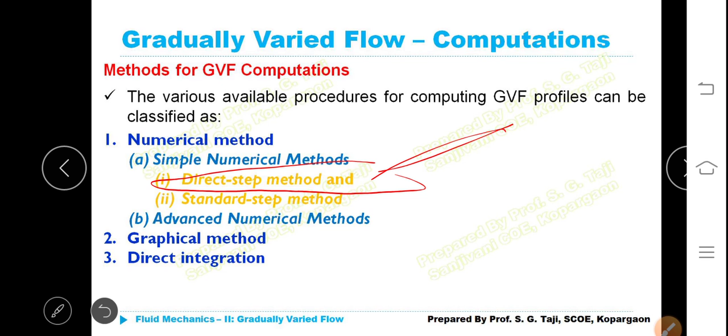Under numerical method, there are two: direct step method and standard step method, whereas only direct step method includes the numerical problem. Okay? So these we have already seen.

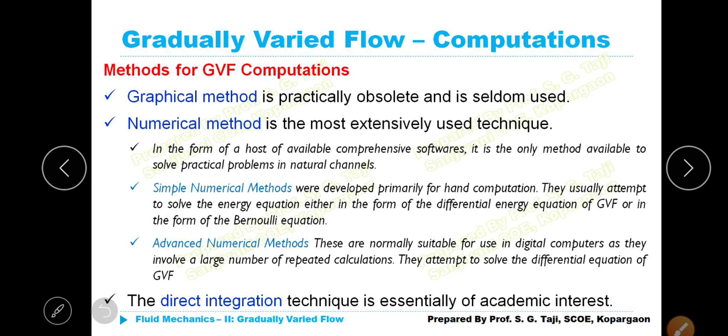Graphical method is practically nowadays obsolete, and direct step method is the one which will be helpful for us to understand the various water surface profiles, how long they occur on the upstream side, so that the remedial measure could be undertaken.

Now, the differential equation of GVF is a nonlinear first order ordinary differential equation that we know. That is dy by dx is equal to s naught whole multiplied by 1 minus yn whole cube by y whole cube, whole upon 1 minus yc by y whole cube, or dx by du is equal to s naught minus sf divided by 1 minus q squared t by g a cube.

What are these: s naught is bed slope, yn is normal depth, y is depth of flow, yc is critical depth, sf is energy line slope, q is the discharge, t is the top width, g is acceleration due to gravity, and a is area of cross section of the open channel.

There are several methods of direct integration of GVF equation: Bresse's method for wide rectangular channel, Ven Te Chow method, and Keifer and Chu's method for circular channel.

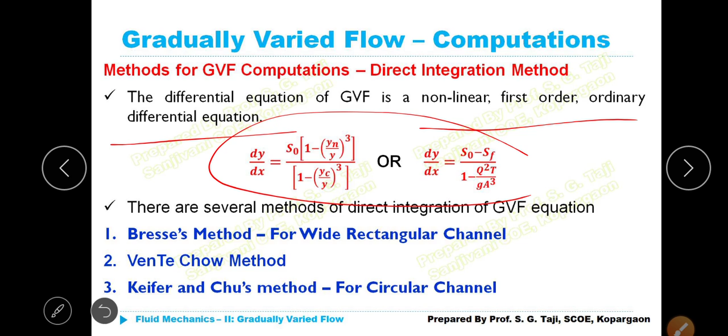Methods of GVF computations: direct integration method. If k is equal to conveyance at any depth y and k naught is conveyance corresponding to the normal depth yn, then...

When flow is GVF, k is equal to q by root sf. When flow is uniform, k naught is equal to q by root s naught. Hence, sf by s naught is equal to k naught by k, whole squared.

If z is equal to section factor at depth y and zc is the section factor at critical depth yc, then we can write z squared is equal to a cube upon t, and zc squared is equal to ac cube upon tc, that is equal to q squared by g. Hence q squared t by g a cube is equal to zc by z, whole squared.

All these equations you have to write and practice, then you will remember. Please do the practice at home by writing on paper. While listening to the lecture, it seems to be very easy. Steps are very easy. But to remember, unless you write on paper with concentration, understanding each and every parameter, it may be a little difficult. Okay, students?

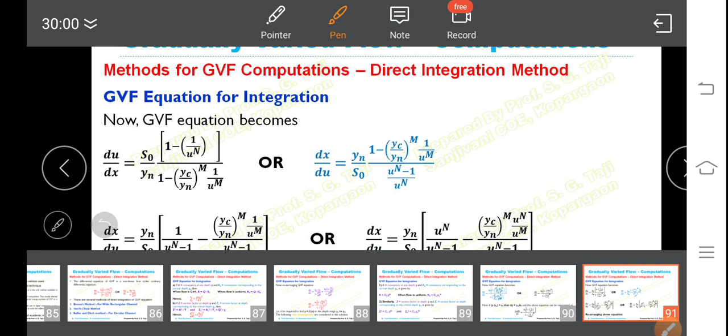Now, the GVF equation becomes du by dx is equal to S naught whole multiplied by 1 minus 1 upon u to the power of capital N divided by yn multiplied by 1 minus yc upon yn whole to the power of m multiplied by 1 upon u to the power of capital M, or dx by du.

Ultimately, we will get this equation. I need not read it again, I already read it.

Rearranging the above equation, we get dx by du is equal to, instead of du by dx, let us take 1 upon it. That means dx by du is equal to yn divided by S naught whole multiplied by u to the power of n minus 1 divided by u to the power of n minus 1 plus 1 upon u to the power of n minus 1 minus yc by yn whole to the power of m, u to the power of capital N minus capital M divided by u to the power of capital N minus 1.

Integrating the above equation, we get x is equal to yn upon S naught whole multiplied by u minus integral of 0 to u du by 1 minus u to the n, plus yc by yn whole to the power of m, integral 0 to u, u to the power of n minus m divided by 1 minus u to the power of n du, plus constant.

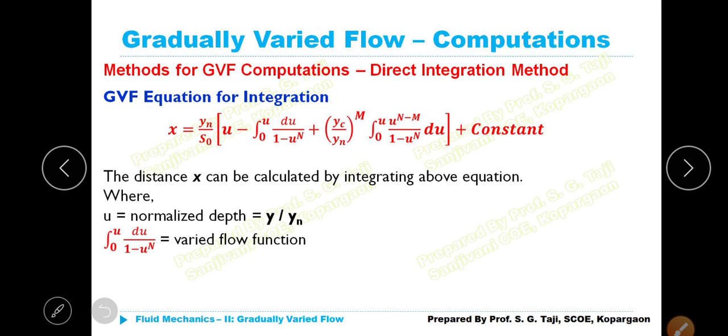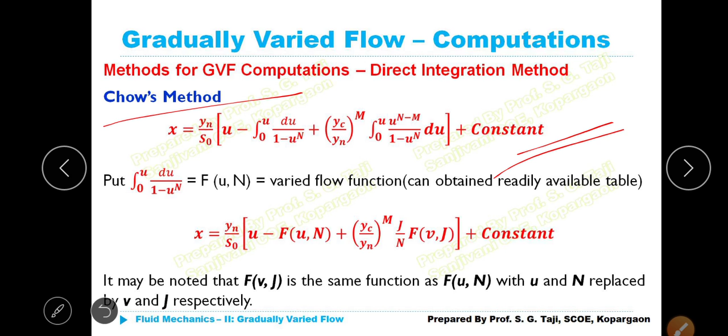Direct integration method. This is also not included for numerical problems, just the direct integration method is included. Ven Te Chow method is also done in a similar manner as the previous one.

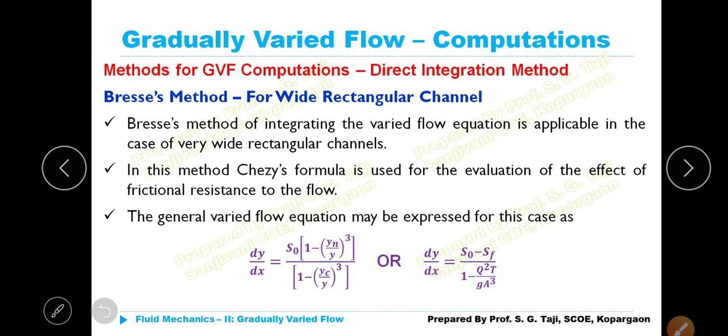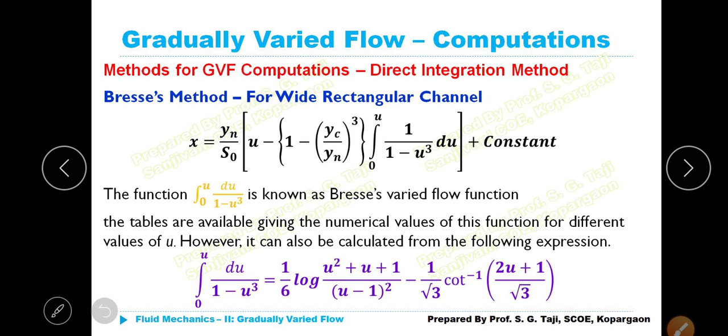This is Bresse's method for wide rectangular channels. These are not included as per your syllabus. However, for gaining more knowledge, if you are interested, you can go through it in detail on your own. It is not of much difficulty, and the steps are very nicely narrated. So I do not wish to carry this out because it is not included in the syllabus.

Now the graphical method of integration of the varied flow equation can be used for both prismatic as well as non-prismatic channels. It uses different values of y, and computation can then be carried out graphically. The GVF equation is given by dy by dx is equal to S0 minus SF whole upon 1 minus q square T upon g A cube.

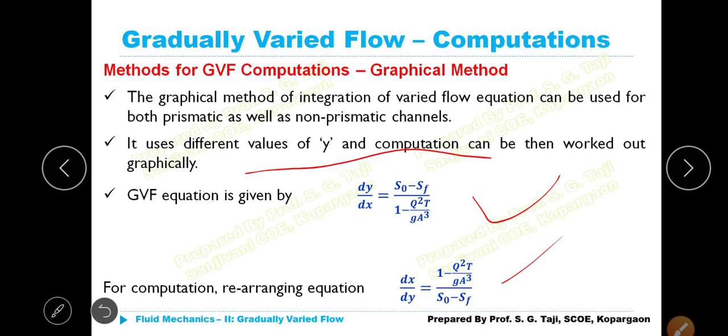For computation, rearranging the equation, we get dx by dy is equal to 1 minus q square T divided by g A cube whole upon S0 minus SF. Since for a given discharge A, T and SF are functions of the depth of flow y, we may write dx is equal to f of y into dy, where f of y is equal to 1 minus q square T divided by g A cube whole upon S0 minus SF.

Now, if y1 and y2 are the depths of flow at points x1 and x2 from the control section, as studied in the previous slides, then by integrating, we get x2 minus x1 is equal to integral x1 to x2 dx, that is equal to integral y1 to y2 f of y dy.

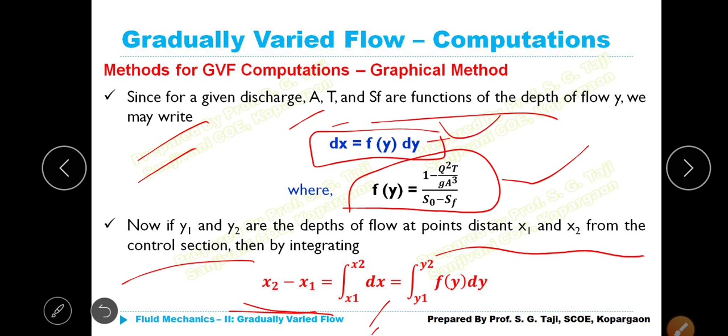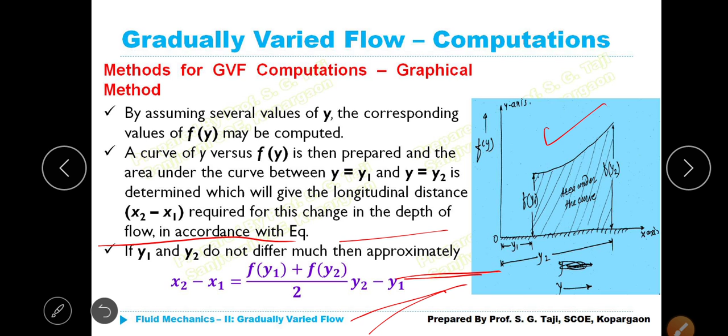Direct step method. Now, this is the one being used as per the syllabus to find out the total length of occurrence of any surface water profile, so as to monitor various practical applications.

This method is possibly the simplest and is suitable for use in prismatic channels. Do you know what a prismatic channel is? It is the one which has no change in depth, width, or cross section throughout, including the bed slope. So the bed slope also is constant or consistently the same.

In this method, the length of channel is divided into a number of short reaches. You can see here, short reach means a considerable least distance, say x1, then x2, or dx1. In order to understand, we put dx1, dx2, dx3, dx4, etc.

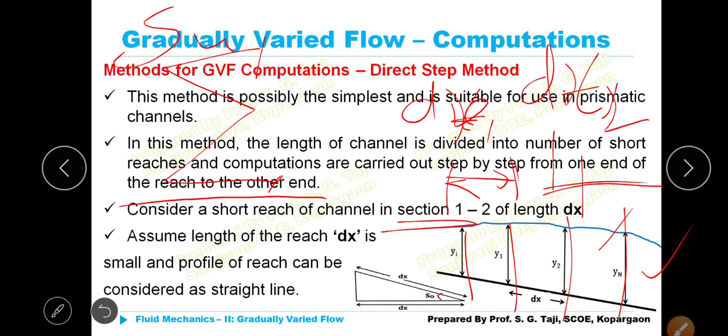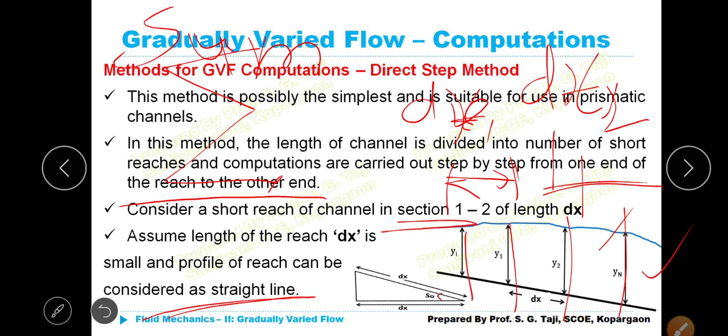Sigma means the mathematical sigma, which means total summation, total sum. Assume the length of the reach dx is small, and the profile of the reach can be considered as a straight line. Unless we assume this, it is not quite possible to consider the profile as straight. Since dx is very, very small, let us assume it small, then conveniently we can understand it as a straight line.

Apply Bernoulli's equation as you know. Z1 plus Y1 plus V1 squared by 2G must be equal to Z2 plus Y2 plus V2 squared by 2G plus HF, where HF is the loss of head due to friction. Z1 plus E1 is equal to Z2 plus E2 plus HF.

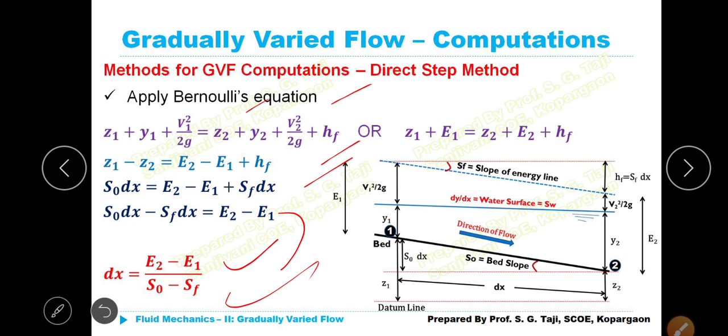We can rewrite it. Therefore, dx is equal to E2 minus E1 divided by S0 minus SF. Ultimately, this equation becomes the figure which you have already seen and learned in the previous classes.

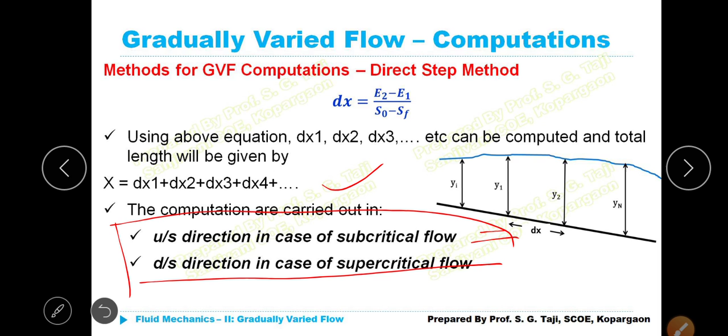Using the above equation, dx1, dx2, dx3, etc. can be computed, and total length will be given by x is equal to dx1 plus dx2 plus dx3 plus dx4, etc. The computation is carried out in the upstream direction in case of subcritical flow, and in the downstream direction in case of supercritical flow. We have to remember this: upstream direction for subcritical flow, downstream direction for supercritical flow.

Now, the procedure. How this direct step method is followed in order to find out the length of occurrence of any water surface profile in the open channel.

For computation of dx, the following quantities should be known: first, discharge Q, channel shape and width, whether rectangular, trapezoidal, circular, etc.; bottom slope S0; roughness coefficient, rugosity coefficient, small n or capital N; and depth of flow Y at any section, generally the control section we make use of.

Now we will see the steps. Carefully observe, because based on these same steps we will solve the numerical problem. Whatever we learn theoretically, we write down in the form of a tabular column, consisting of around 13 to 14 columns. Not difficult, very easy — only thing is you must understand these steps very carefully.

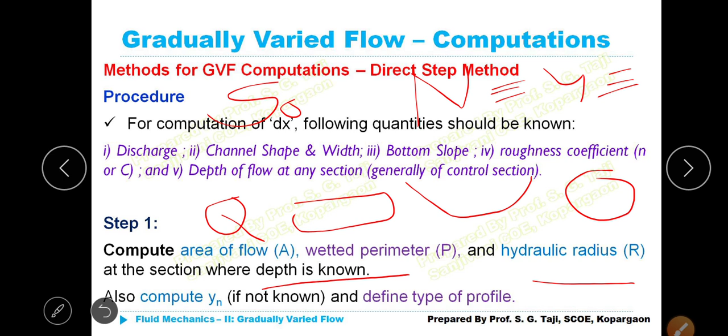Step 1: first compute the area of flow A, wetted perimeter P, hydraulic radius R at the section where depth is known. Also compute Yn, that is normal depth, if not known, and define the type of profile.

Step 2: compute average velocity V, velocity head that is V squared by 2G, and then specific energy E at the section where depth is known. Also compute slope of energy line SF using either Chezy's formula or Manning's formula for finding velocity.

We know that V is equal to C under root R SF, where SF is equal to V squared divided by C squared multiplied by R; V is the average velocity, R is the hydraulic mean radius, and capital C is Chezy's constant. Similarly, using Manning's formula, SF, the slope of the energy line, is given by n squared V squared divided by R to the power of 4 by 3, where small n is equivalent to capital N, the rugosity coefficient, V is the average velocity, and R is the hydraulic mean depth, that is area by wetted perimeter, A by P.

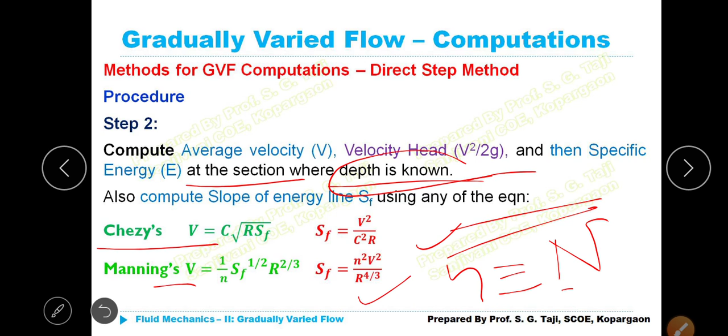Next, step 3 — only two more steps are there, very simple, we can solve the numerical problem quite easily. Assume new depth at any other section; this section should be close to the first section. Suppose in an open channel you have a first section, second section, that is dx we have assumed; similarly you take another section 3, very close to this. Also, the increment in y should be small.

Then compute all the above quantities for the new assumed depth — that means y, y1, y2, etc. As we proceed, the depth may be different, so the corresponding depth should be considered, and all the quantities should be calculated as before.

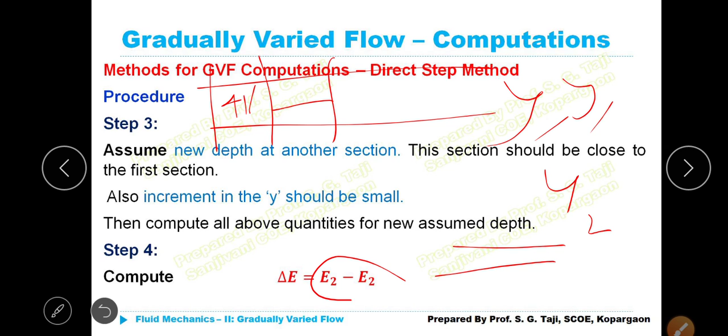Step 4: compute delta E, which is equal to E2 minus E1. Here it was wrongly printed as E2 minus E2 — please correct yourselves, students, this should be E2 minus E1.

Step 5: compute average SF, that is the mean value, SF1 plus SF2 divided by 2. Use this same average SF in the equation of dx.

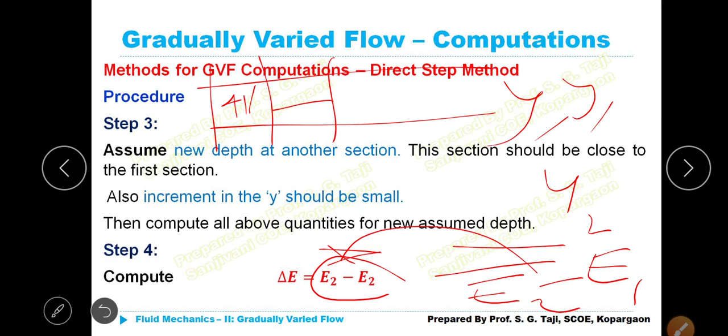Step 6: compute dx, which is the length of the curve between the two sections, section 1 and section 2. This dx equals E2 minus E1, the difference between specific energy, divided by S0 minus SF. In the previous case it was mistakenly written as E2 minus E2 instead of E2 minus E1, but now it has been corrected in this slide.

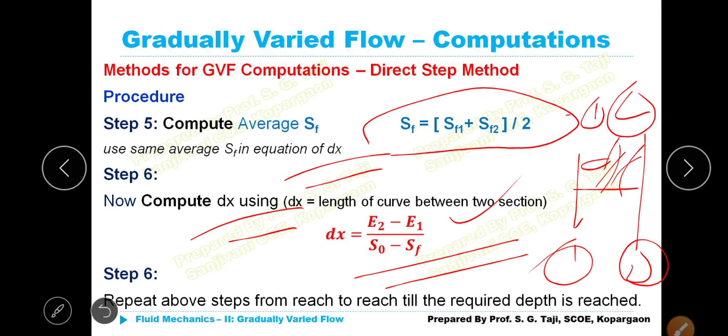Repeat the above steps from reach to reach till the required depth is reached. That's all.